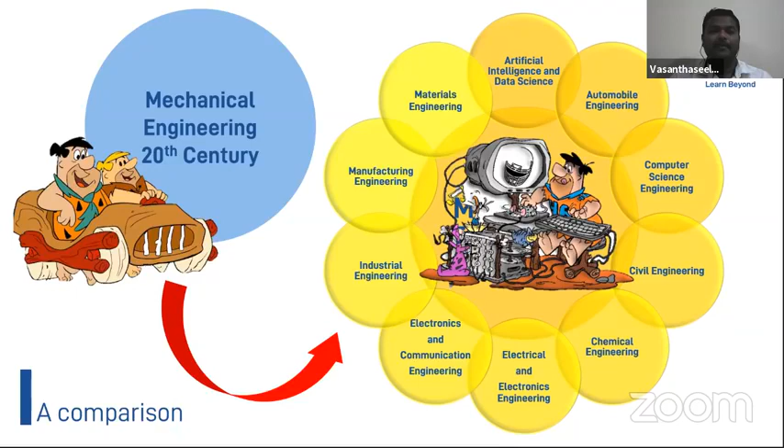So how has mechanical engineering evolved? I've given a small simple representation for you, a comparison. In the 20th century, mechanical engineering seemed contemporary and traditional, and now it has evolved to a different view, as you can see from the left side to the right side. I've given a small cartoon for your easy understanding. Without mechanical engineering, no field is complete. Right from artificial intelligence to materials engineering, all leading engineering fields require the basics and fundamentals of mechanical engineering, as shown here - computer science, civil, chemical, electrical, and electronics and communication. So whatever field you choose in this modern day, there will be an application of mechanical engineering in every corner.

So let us see what opportunities have evolved with mechanical engineering now. Earlier, mechanical engineering was known for design, machining, and services. In initial stages, mechanical engineering was completely known for CAD designs, CNC works, industrial engineering, safety designs, and materials. Whereas now, mechanical engineering is evolving and booming to the next level in the field of engineering.

We can see right from automation - industrial automation is the key role, in line with electronics and communication engineering. Followed by non-destructive testing, one of the advanced technologies employed in every manufacturing industry, followed by robotics, without which no industry is growing and booming, and drone technology, also known as unmanned aerial vehicles or unmanned aerial vehicles. This drone technology is evolving in a higher way, in a different way, so that one who enters this drone area will experience a different level of mechanical engineering. It employs both mechanical engineering structural designs, and also electrical, electronics, and communication engineering.

And when we are with Middle East countries, more focus will be on the oil and gas industry. Yes, mechanical engineering has room for oil and gas engineering, also for MEP solutions - mechanical, electrical, and plumbing solutions. You have plenty of opportunities to explore the oil and gas industries through mechanical engineering. And then IoT - yes, mechanical engineering is now moving towards industrial IoT, Internet of Things with industry. Most industries now require IoT operations. Since in this pandemic, it will be helpful for mechanical engineers to operate industries and manufacturing units using Internet of Things.

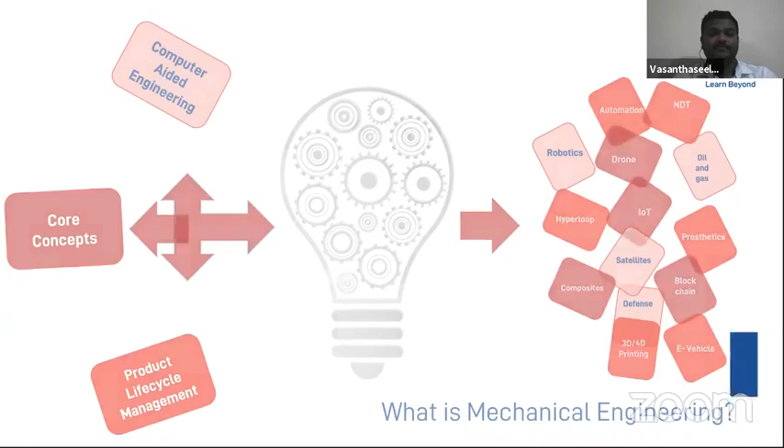So when you take mechanical engineering, we can see a few core career paths. These are the core competencies in mechanical engineering, which will have its product life cycle, or else it will have its sustainability over the next two decades. The first one is automobile. It's one of the evergreen career pathways that one can choose as a mechanical engineer.

So automobile, from conventional to electric, from electric we are going to supercars, and we are developing special vehicles for special purposes. So we have many managerial concepts in line with automobile to make it sustain for ever, up till the presence of the human race. There will be a presence of the automobile industry.

And next is biomedical. As I informed earlier, this I have shown you a prosthetics. These prosthetics are artificial replacements for natural limbs. For example, limbs in the human body are legs and hands. Once these get damaged, they cannot be replaced with a natural one. So in biomedical engineering, with the aid of designs and materials from mechanical engineering, we create prosthetics.

These prosthetics can be 3D printed. Also, they can be devised by additive manufacturing or conventional manufacturing methods using composite materials. So this is the main application of mechanical engineering for biomedical.

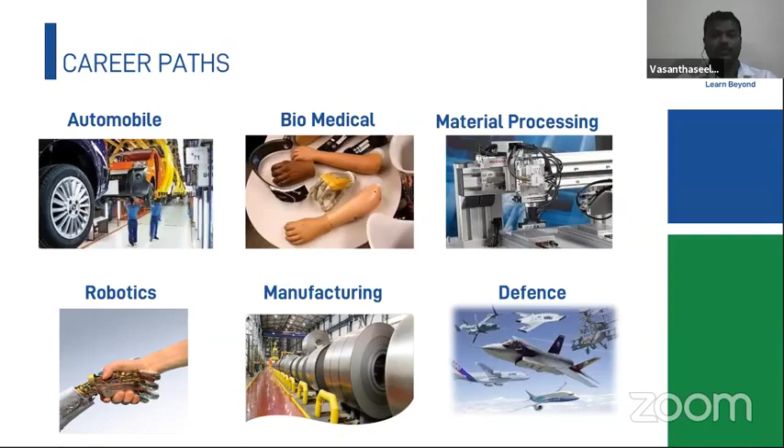We have a few other new frontiers in mechanical engineering. One is micro electro mechanical systems. These micro electro mechanical systems have their own application with robotics and automation, where minor or small level electro mechanical systems are coordinated in such a way to complete the process.

And the next one is nanotechnology. It is applied in the medical field - nanotechnology, biomechanics, everything is there in line with the medical field. Even the medical instruments and medical supplies which we design are in line with mechanical engineering.

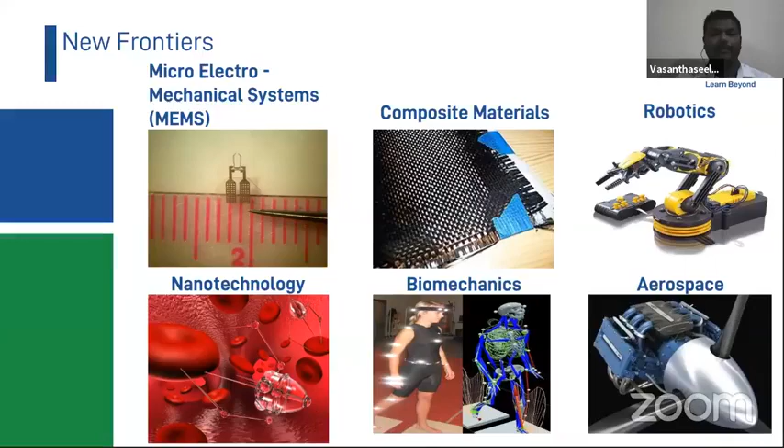So what do we do at KPRIET? We are in line with the new frontiers of mechanical engineering. We have the Center for Machining and Materials Testing. With this center, we constantly do new research and we are producing new natural composite fiber combinations so that it can serve the future human community for special purposes.

This laboratory is a special laboratory established by KPRIET. With this, we have produced different types of materials for different applications, right from automobile applications to biomechanics, also for prosthetics. Here we design the materials for the same application.

Then we have the Center for Robotics, and it is one of a kind center present in this nation, especially in Tamil Nadu. This Center for Robotics is powered by LN, Lucas-Nülle. This Center for Robotics completely nurtures the students' skills required for robotics and automation in industries. This center mainly focuses on industry requirements.

And then the 3D printing laboratory. We have some 4 machines for the 3D printing laboratory. We also have SLA machines, which use lasers to 3D print objects. Students have been given free hand with these laboratories to develop their own skills in 3D printing. Our students have designed a few products that have been given for participation at national level competitions, especially Toycathon 2021, which is the very recent place where our students participated using these centers.

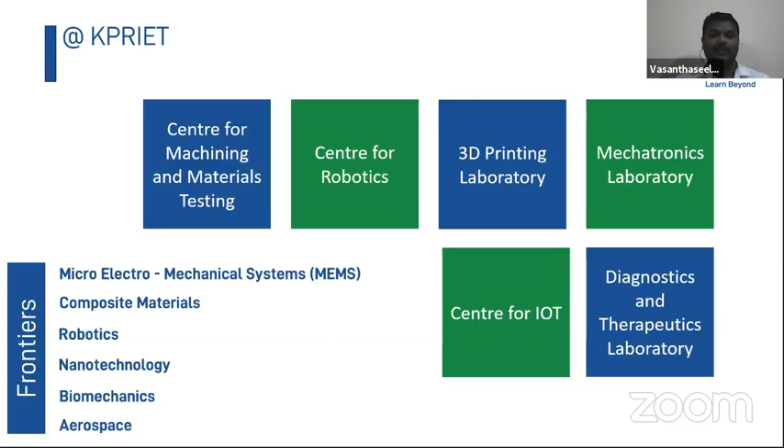We have the diagnostic and therapeutics laboratory, established in line with biomedical engineering. It paves the way, as discussed earlier, to bring out advanced prosthetics and additional limbs equivalent to the human body. Research is going on in these areas at our diagnostic and therapeutics laboratory.

So these are again major thrust areas. Product development is one of the major concerns where students are required to learn more. This will bring out entrepreneurship. Few IITs are nowadays insisting their doctoral candidates to bring out product development and establish a start-up to get their doctoral degrees.

Why is that so important? Product development is the place that serves the needs of consumers. So we can get the particular needs of the consumer to support product development.

And then automobile engineering, as said, we have been transforming from conventional to electrical vehicles. Even those electrical vehicles are nowadays supported by supercapacitors, which act as a starter and give the highest torque or thrust for any electrical vehicle to start. This transformation is bringing out more avenues for students to explore in automobile engineering.

In early days, there were more than 50 subsystems in automobile engineering. Even nowadays, the electronic vehicles we use require more than 50 ECUs for a higher-end luxury car, and at least 5 ECUs for an average car that we use day to day.

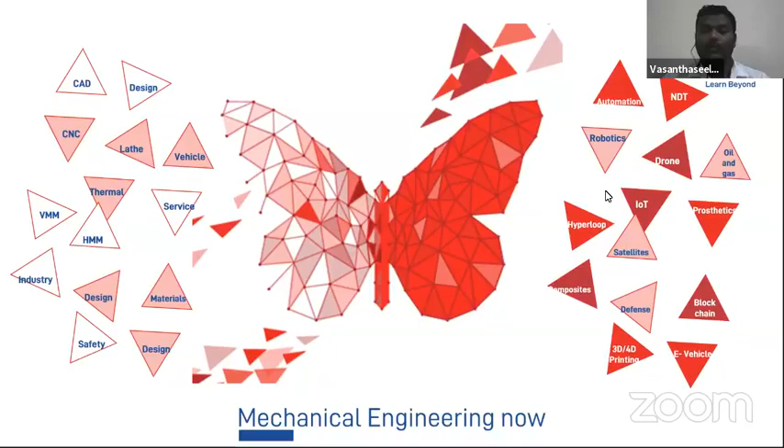Similarly, we have some other skill courses for HVAC, robotics and automation, and even electronics - that is, automobile electronics for onboard diagnostics. So we have a few other skill courses that will make the student complete mechanical engineering and be directly employed in an industry.

Very good, very good, very good. Thank you so much Mr. Vasanthaseelan for the comprehensive talk and highlighting the use of being a mechanical engineer in today's world. Thank you so much. Thank you. Over to you, thank you Mr. Chaudhary, Seelan.